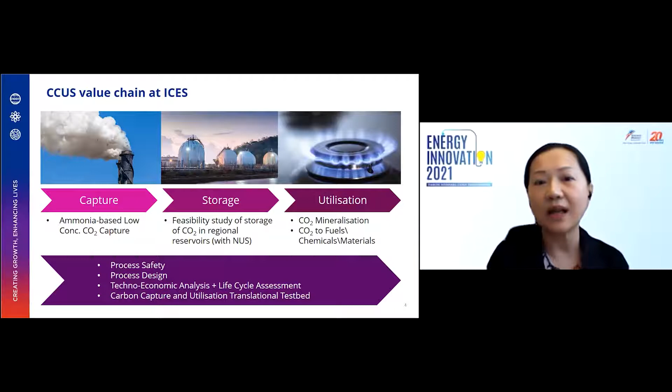And in the past few years, ICES has been working on the development of CCUS technology across the value chain. We work on capture, storage, and utilization. And in the meantime, we also have other capabilities such as process design and safety, techno-economic analysis, and life cycle assessment to support the research. And last but not least, importantly, recently we initiated the conceptual design of a carbon capture and utilization translational testbed.

So let's go to our first topic on CO2 mineralization. And we know human beings are facing the threat of sea level rising. And Singapore is very vulnerable to this because 30% of our land in Singapore is lower than 5 meters above the sea level, including many important areas such as Jurong Island. So we need a large amount of sand for coastal protection.

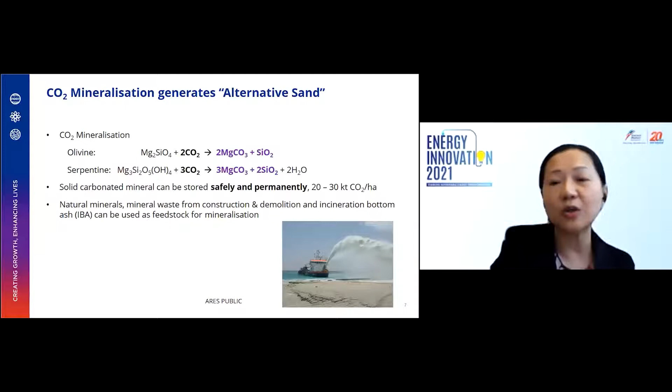And actually, CO2 mineralization is able to utilize waste carbon dioxide to do the mineralization. And this will generate a solid carbonated material and is useful for land reclamation. And the raw material that can be used is not limited to the natural minerals. Other waste materials such as incineration bottom ash, waste from construction, all can be used for this mineralization. And ICES has developed a novel CO2 mineralization technology. So in the next slide, let me take you through a little bit of the technical details. Let me show my laser pointer.

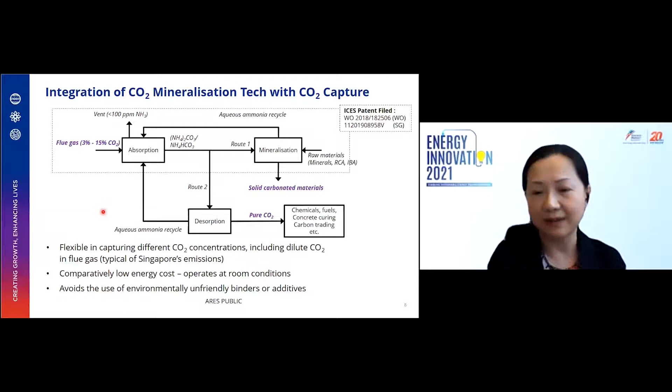So our technology actually can bring 3 benefits to Singapore. It can reduce carbon dioxide emission, permanently fixing carbon dioxide in solid materials. And for these materials, if we use some of the waste material, it will reduce the landfills. And in the meantime, this can be used as alternative sands or as building materials, which means we can reduce sand imports.

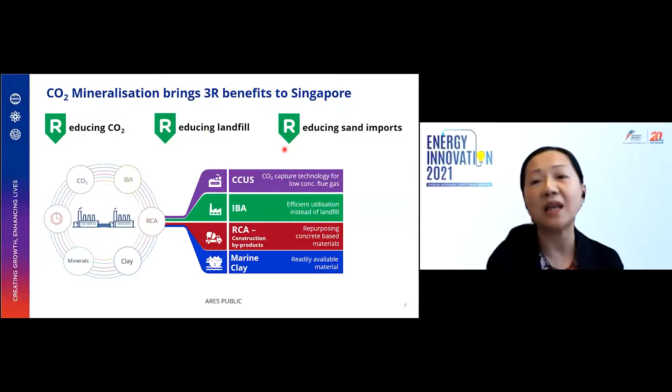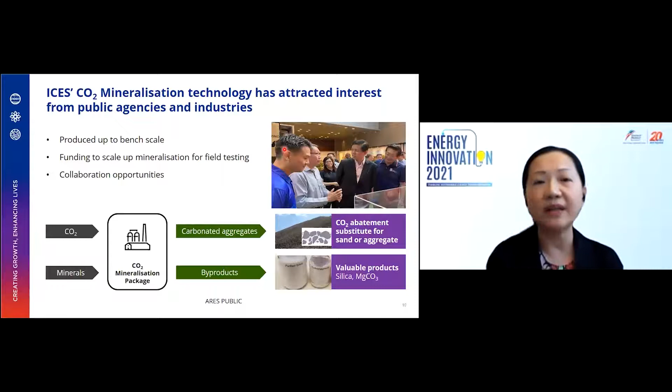And our technology has attracted interest from many public agencies and industries. So we are aiming at scaling up the technology for field testing in future. And we're also looking for collaboration opportunities to bring this technology to commercial scale.

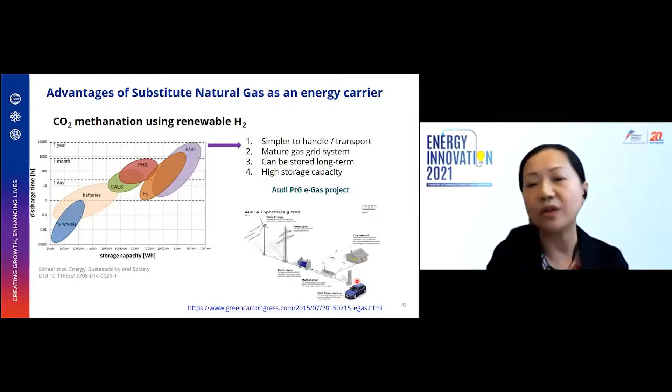And here shows the example of the Audi power-to-gas e-gas project. So they can use this SNG as an energy carrier to convert renewable energy into methane, and this can be used to drive cars. IHI is a Japanese heavy industry company, and we have been working with them for years to develop catalysts and technology for this CO2 methanation.

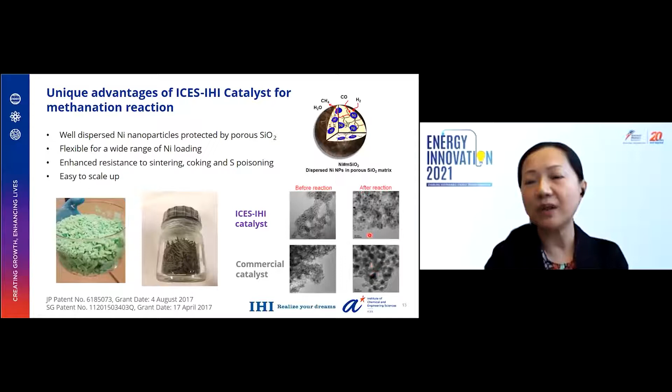And we have developed a very unique structured catalyst, which is flexible and can be synthesized for a wide range of nickel loading as the active phase for the reaction. And this catalyst is very robust. It has good coking resistance, sulfur resistance, and sintering resistance as well. So you can see here we have much smaller particles after reaction compared to a commercial benchmark catalyst.

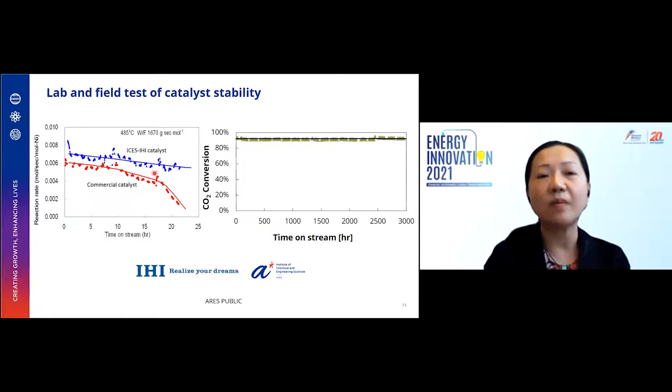And this catalyst has been tested in Japan as well, in the field test as well as in the lab test, for CO2 as well as CO methanation reaction. And the catalyst has shown very good thermal stability and also activity compared to a benchmark commercial catalyst.

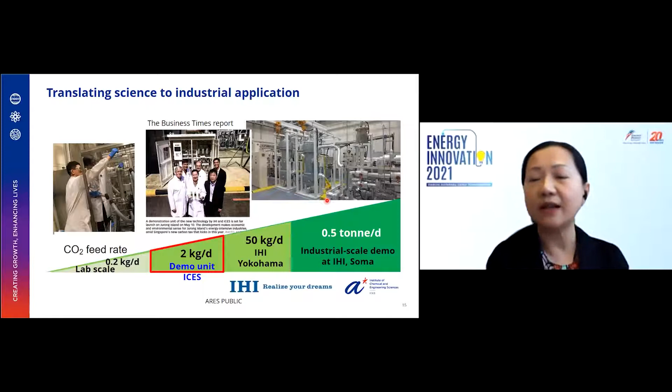So together with IHI, we have successfully translated this catalyst and technology from very small lab scale up to now a 0.5 tons per day CO2 commercial industrial scale demonstration at Japan's Soma Green Energy Center.

And the next topic is CO2 to jet fuels. You can see here in Singapore, in 2017 alone, we consumed about 8 million tons of jet fuel, and this will release millions of tons of carbon dioxide. Although there are solutions using battery or hydrogen to decarbonize the aviation industry, there's a limitation, because hydrogen and batteries have very, very low energy density compared to hydrocarbon fuels. And they're not drop-in fuels, which means you need a lot of change to the infrastructure overall.

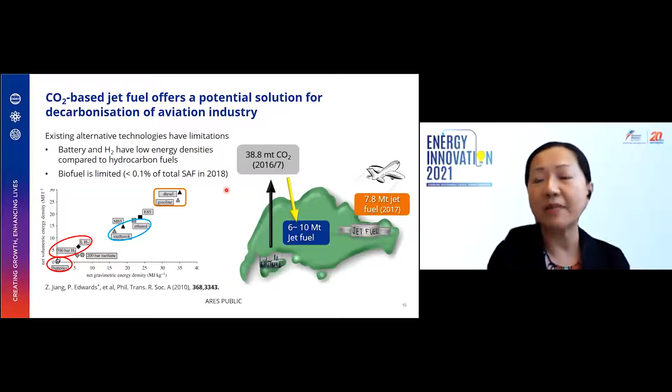Biofuel is another choice, but the availability of biofuel is also very limited. So CO2 can actually be used as raw material to make jet fuel. And this is a significant advantage because we can help reduce CO2 emission and also help the decarbonization of the aviation industry. And in ICES, we are working on this direct thermocatalytic conversion of CO2 to jet fuels.

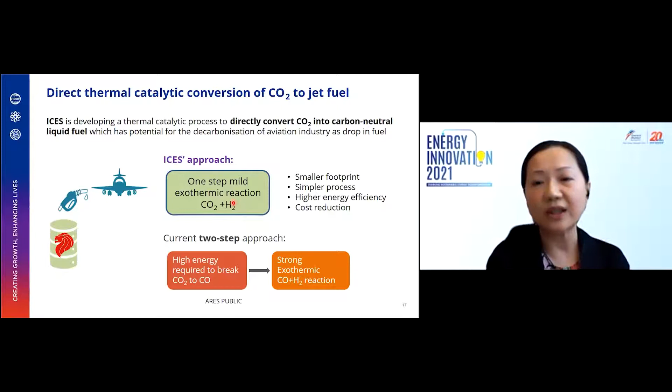Compared to the current two-step approach, we are using a one-step direct approach. And this approach has advantages such as smaller footprint, simpler process, and higher energy efficiency, and all this will bring cost reduction. And with the support of A-star seed funding, we have some very promising preliminary results.

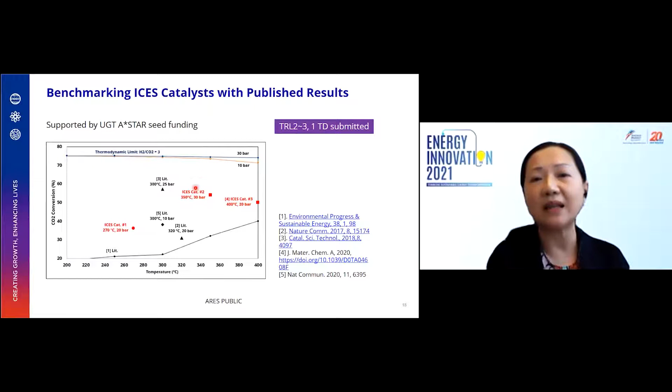So the red color is our catalyst, and we benchmarked it with some good literature results, and the results are quite comparable. And of course, compared to the thermodynamic limitation prediction, we still have room to improve the catalytic performance. And the next one is CO2 to methanol.

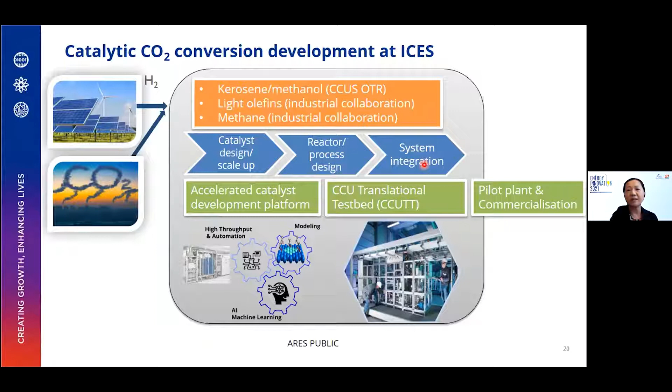So this page summarizes our catalytic conversion of CO2 to fuels and chemicals. We can work on catalyst design, scaling up, reactor process design, and also system integrations. So with the support of our accelerated catalyst development platform with our sister RIs, IMRE and IHPC, and this translational testbed, we hope we can accelerate the transformation of the technology from lab to commercial pilot plant testing scales.

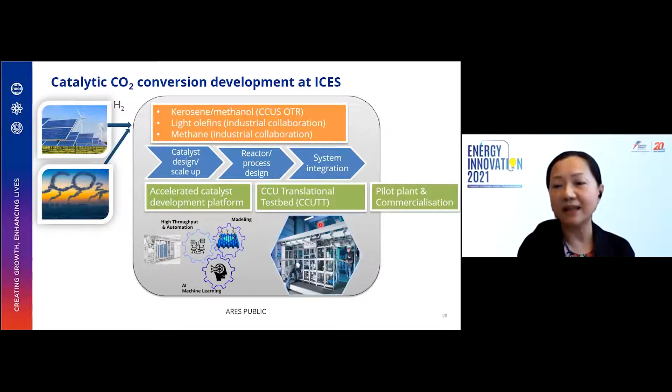And so the next topic is this translational testbed. So why do we need this testbed? It's well recognized that there's a valley of death in the translation of research ideas into industrial scales, particularly in the process industry, where the scale and the cost of failure increase with the TRL level. That's why companies are very selective when they choose the technology to testbed. While research performers always have limited resources to validate their breakthrough ideas at larger scales. So many breakthrough ideas fall into this valley of death, and this is where the major de-risking is necessary.

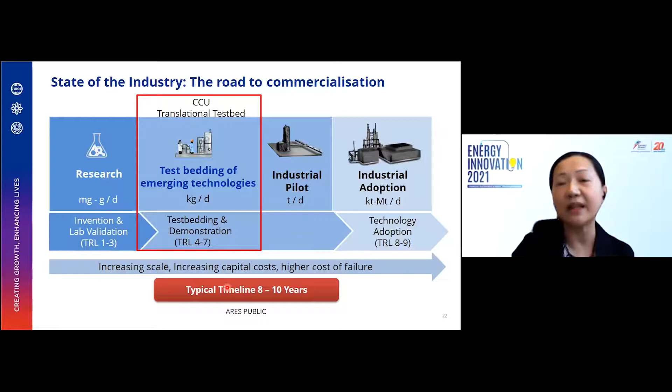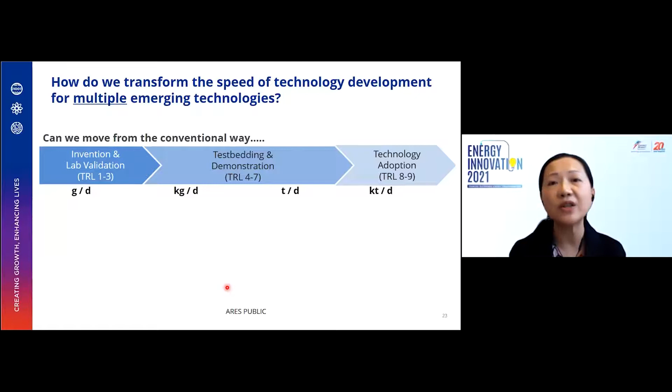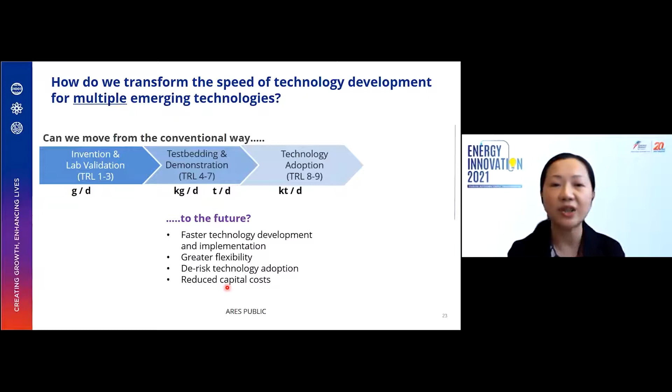And in addition, a single technology usually will take about 10 years to be commercially available in the chemical industry. So the question for ICES is whether we can move away from this conventional approach to be faster, more cost-effective and more flexible in developing not just a single technology, but multiple different emerging technologies, and help companies to de-risk business decisions.

So our response to this is a unique, first in its kind, flexible, modular, plug and play testbed, which will allow us to rapidly adapt the testbed to perform and demonstrate different types of emerging CCU technology, from research performers, startups, or technology providers, under more realistic industrial conditions. Examples of CCUS technology can be membranes for CO2 capture, liquid and solid-based capture technology, or CO2 conversions. So we hope through this concept we can accelerate the translation of CCU technologies and de-risk business decisions for the next step of industrial piloting or ultimately adoption.

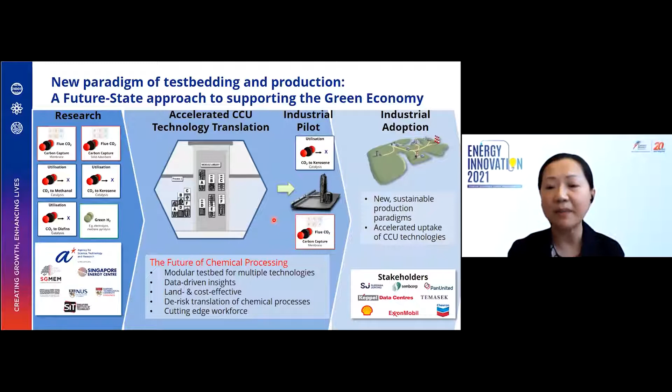So this comes to the end of my presentation with 3 key takeaways. ICES is active in research areas of CCUS with different TRLs. And the unique, first in its class, flexible, modular, plug-and-play testbed is at the conceptual design phase. We hope this will greatly help the acceleration of the translation of technology. And we are looking for researchers and industrial partners for collaborations.

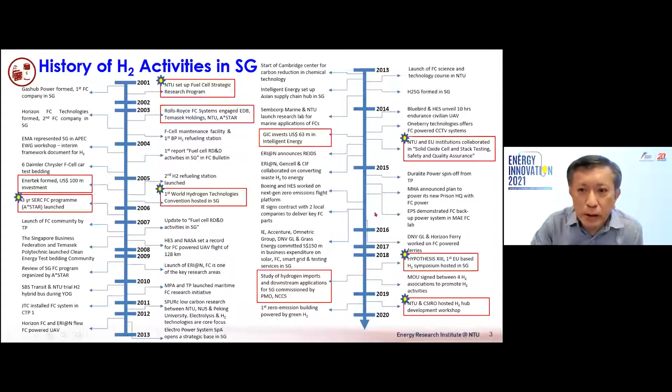Next is the hydrogen and fuel cell research journey that I walked through. I started off with methanol reforming, and then, with funding support from British Gas, I worked on natural gas reforming. Then I moved to solid oxide fuel cells, then PEM fuel cells, then electrolyzer cells, solid oxide electrolyzer cells, then PEM electrolyzer cells. More recently, my research effort is more focused on the commercialization of PEM technology, and some cracking technology, including ammonia cracking and CDM, which stands for catalytic decomposition of methane, or methane cracking. Last but not least, some feasibility studies.

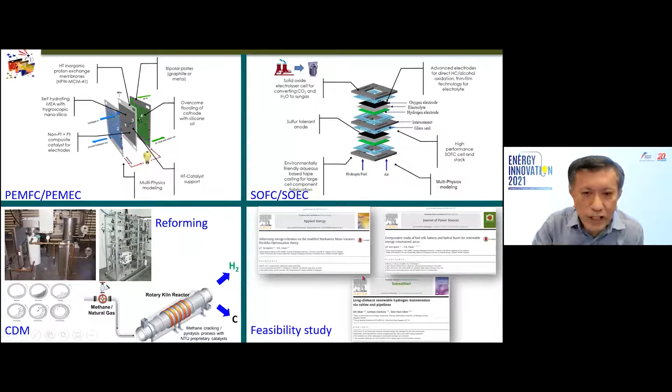And the latest paper that we have published is on long-distance renewable hydrogen transmission via cable and pipeline. So this is actually a case for Singapore: if we transport hydrogen from Australia to Singapore, covering a distance of 4,500 kilometers, we look at the cost and a lot of the constraints as well.

So a snapshot of the hydrogen and fuel cell research over the last 30 years: you can see there are many projects, including an industrial project where we pushed a fuel cell system to Jurong Island and tapped the gas from a chlor-alkali plant, Far East chemical industry, and proved that hydrogen from industry can be used to generate power. And you can see these are fuel cell systems developed in-house, a 5 kilowatt combined heat and power system. We also fly UAVs using fuel cells, and some hydrogen generation projects as well.

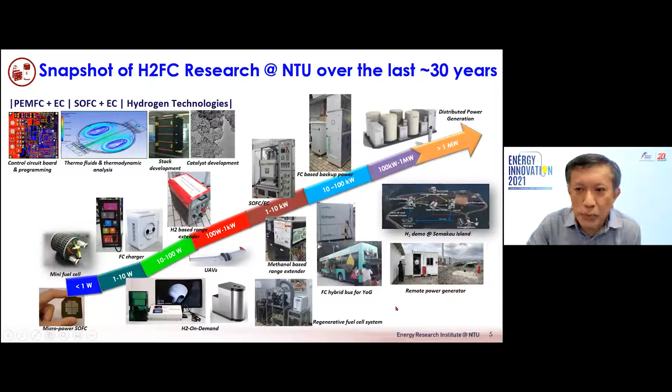There are 4 laboratories. One is for fuel cell fabrication and demonstration, including the methane cracking project. One is on power to gas. Just now, Leeway also shared converting CO2 and hydrogen into methane. And we have one laboratory devoted to catalyst fabrication, and this technology has been transferred to industry. And the last laboratory I have is in the China-Singapore International Joint Research Institute at Guangzhou Knowledge City, meant for commercialization and supporting industry on fuel cell projects.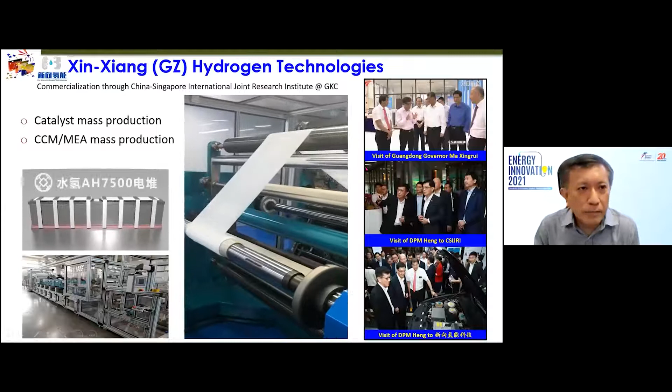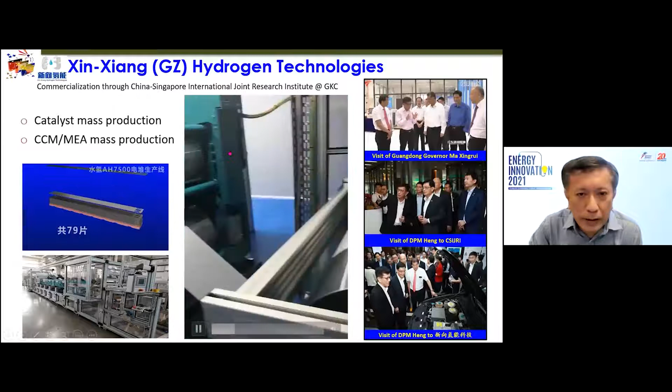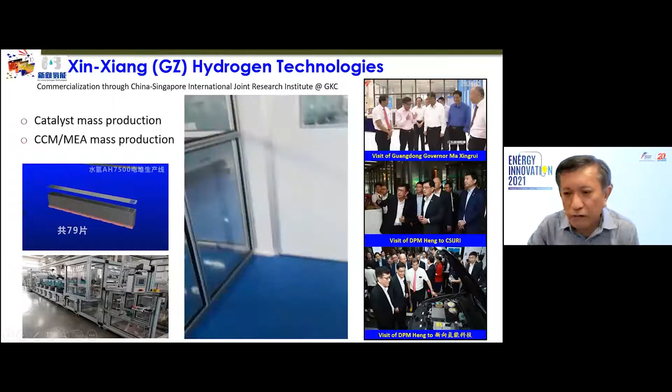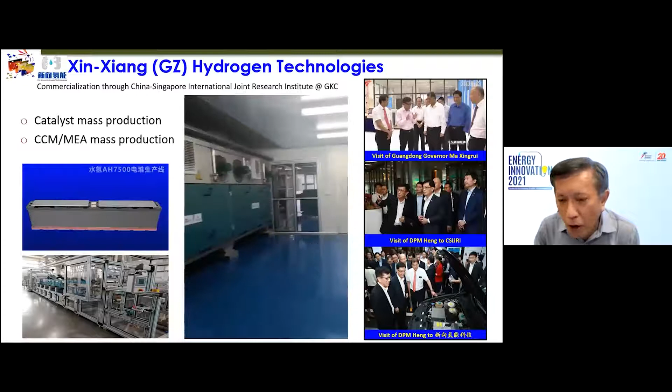And here you can see the company that I set up, commercialized through the China-Singapore International Joint Research Institute. The company focuses on catalyst mass production and CCM or MEA mass production as well. This was made into a fuel cell stack by our sister company and demonstrated in a fuel cell vehicle. Essentially, this is a range extender, not a full fuel cell vehicle. There are 2 7.5 kilowatt units, making 15 kilowatts, that use methanol as fuel, with onboard reforming generating hydrogen for the vehicle. DPM Heng and the Governor actually visited the company.

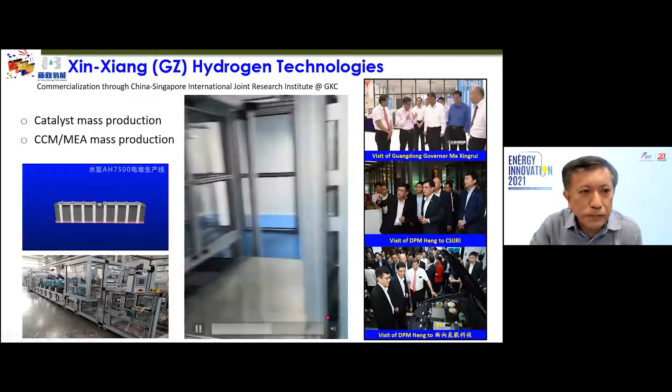Another effort is that NTU and Sydrogen Energy formed a partnership. If you read the newspaper in the last few days, Sydrogen was formed in March, a JV company of Nanofilm and Temasek, and they set aside 140 million for this effort. The core activity is manufacturing fuel cells. The collaboration with NTU is on PEM technology, and we license the technology to them to fabricate the CCM and the catalyst, key component design and manufacturing, and full characterization of the fuel cell.

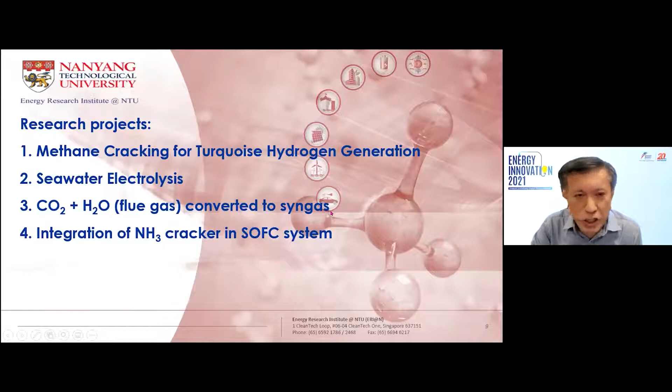Now come to the 4 projects that I'd like to share with you. The first one is methane cracking for turquoise hydrogen generation. Essentially, this is a technology that can potentially produce hydrogen at a cost like SMR, but without the CO2.

So methane is cracked into hydrogen and carbon. The byproduct carbon is actually graphite powder and can be valorized to offset the cost of the hydrogen. Traditionally, such a method is used to produce carbon black. Carbon black has a lower value than graphite, but even so people can afford to throw away the hydrogen because the carbon black is more valuable than the hydrogen. Carbon black is used mostly in car tires.

So in this project, we produce graphite powder instead of carbon black. Graphite powder has a lot of applications. One application you can think of is battery materials. If you look at the Tesla battery, one battery will need 96 kilograms of graphite powder. So you can expect growth in the demand for graphite when all the cars on the roads are converted to electric vehicles powered by batteries.

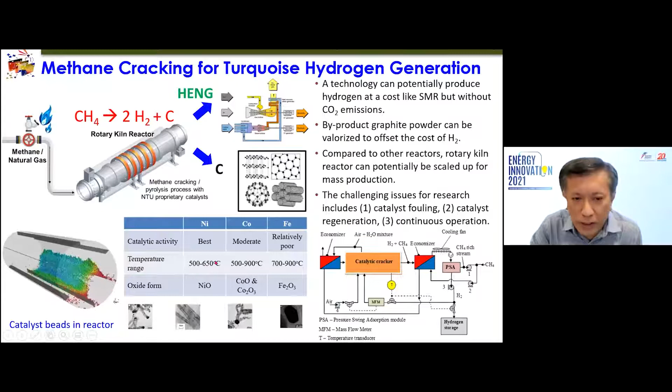There are different types of catalysts. Commercially, like the one used by Hazer Group, is iron. Iron has relatively poor catalytic activity. The best one so far is still nickel. The operating temperature is actually not as high as steam methane reforming. You can see the temperature range here can be quite low, 500 to 650 using nickel.

Another one is seawater electrolysis. The solid oxide cell is perhaps the only technology that can operate in both fuel cell and electrolyzer mode, meaning one device serves two purposes. This leads to less investment if such technology is used as an energy storage device. The electricity-to-hydrogen heating value efficiency can be more than 100% if waste heat is available. The electricity input is preferably from renewable energy. If we have waste heat, the waste heat and electricity combined, based on conservation of energy, give the hydrogen a higher enthalpy than the electricity we put in.

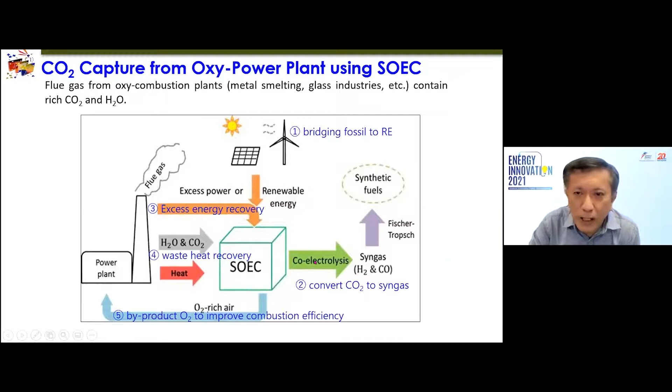But from here, you can see that it actually provides most of the oxygen needed in a combustion power plant. So for the downstream application, you can actually use it to produce synthetic fuel, like for example, kerosene. So the entire system is expected to have a very high efficiency.

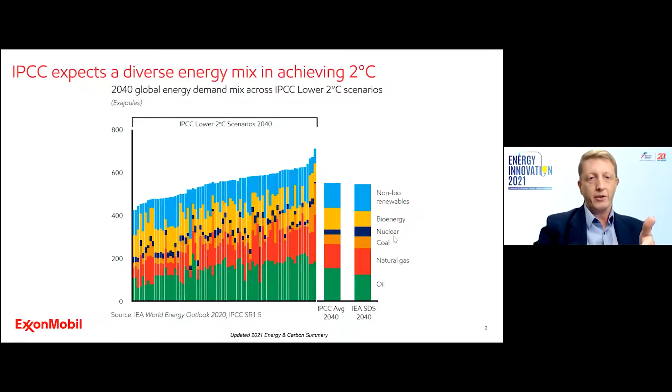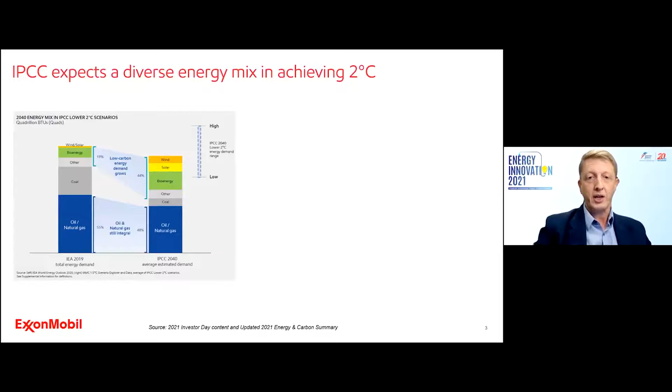So to put this in perspective, let's compare the 2019 energy demand mix versus the IPCC 2040 average mix. The color scheme, unfortunately, is different in this plot. I'm sorry for that, but the left figure here is the 2019 energy demand mix, and the right one is the average from the 2040. And what you're going to see is a few things that are kind of interesting. One is that energy consumption in 2040 is less than 2019.

In other words, to keep to the 2 degrees C scenario, we need to actually be consuming as a world less energy than we are today, with a much bigger population and a much larger GDP. So this really strongly implies a need for significant energy efficiency improvement. In other words, we need to use energy to do more with consuming less of it. There's obviously a very significant growth in low carbon energy, renewables, and so on. Interestingly, it shows that oil and gas still constitute about 48% of the total energy demand.

So then how are we doing on our way to this 2040 view? Well, if you compare how we did from 2010 to 2019 and the rates of growth of everything, you can see that historical growth rates for wind, solar, bioenergy, nuclear are actually much lower than what's needed. That's including extremely rapid growth in places like China. The energy demand for oil and natural gas and coal is higher. The growth is higher than what these IPCC scenarios suggest would be needed. And the energy efficiency improvements have not been fast enough. So that's sort of the state.

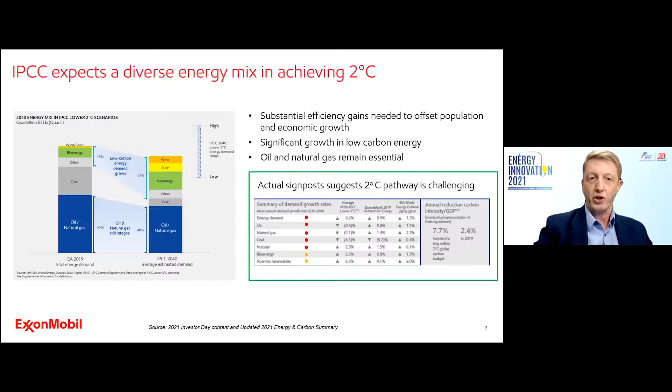And as the world recovers, it probably will look slightly different, but the basic thrust is that the emissions are quite large by the 4 sectors. So it's electricity generation from all sources, natural gas, coal, and so on. Industrial sector, which includes our industry, petrochemical, manufacturing, agriculture, and then transportation, all sources, trains, planes, automobiles, and ships, very importantly from Singapore's perspective, and then the residential commercial. And so this gives us a way to think through what is the R&D we want to focus on. And it's basically to focus on wedge scale or really gigaton scale CO2 mitigation.

So starting from the electricity generation, this is ExxonMobil's perspective. We're focused a lot on natural gas, which is 95% plus of Singapore's own electricity generation, with CCUS and the renewables and energy storage, grid energy storage.

Then on the industrial side, it's reducing the energy intensity and the emissions intensity associated with manufacturing. Once again, this is ExxonMobil's perspective. What do we do in the refinery and the chemical plants on Jurong Island and nearby? We convert chemicals and we move fluids and we cool and heat things. And so new kinds of catalysts and new kinds of processes are going to be a big important part of energy efficiency improvements. And then of course, CCUS and hydrogen, where you'd have some sort of fuel replacement for

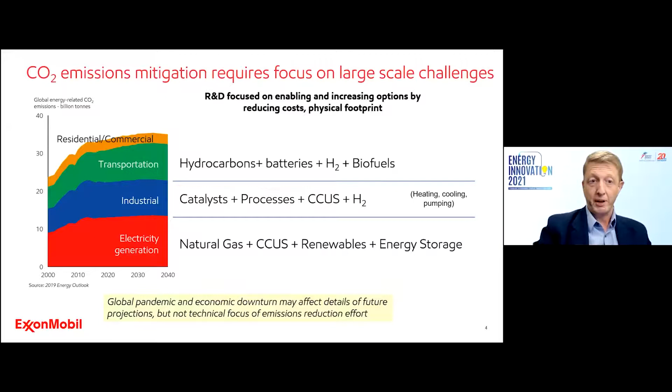some of those activities. And then on the transport side, hydrocarbon is still going to be a major part through 2040. But of course, batteries for transport, hydrogen and biofuels. And then on the residential commercial, it's new kinds of materials to reduce the emissions intensity, the energy intensity of construction and operations.

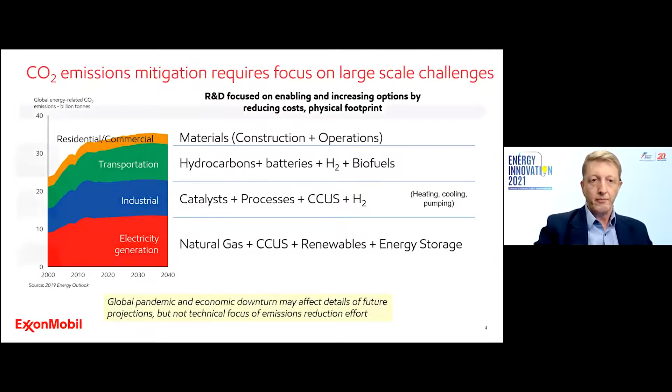So just focusing a bit more on CCUS, because that's a big topic today, and it is a big topic of what we're doing in Singapore. For some background context, ExxonMobil has a working interest in more than 1/5 of the world's capacity, capturing about 9 million tons of CO2 a year. That's a lot, but it's not nearly enough. I will definitely concede that. And actually, over the past 30 years, ExxonMobil has captured more CO2 than any other company, accounting for about 40%

of cumulative CO2 captured. Earlier this year, ExxonMobil announced a new low carbon solutions business. Initially, they plan to advance a number of carbon capture and storage opportunities around the world, including, they explicitly mentioned, Singapore, Southeast Asia as well. They plan to invest about $3 billion through 2025 on commercial CCS projects, not R&D. So the R&D I'm talking about now is not part of that, but it's rather feeding and supporting the LCS, the low carbon solutions team, which is important because we're focused on the next generation of CCUS technologies.

And in fact, we're focused on technologies with lower CapEx, lower physical footprint, which is really significant for Singapore, that require lower energy for operations. And I show you the buckets of how we're thinking about it. The cost and the technologies very much depend on the concentrations of the CO2, as you might imagine. I kind of had 3 large buckets. Of course, as you get into the details, you can subdivide it a lot more.

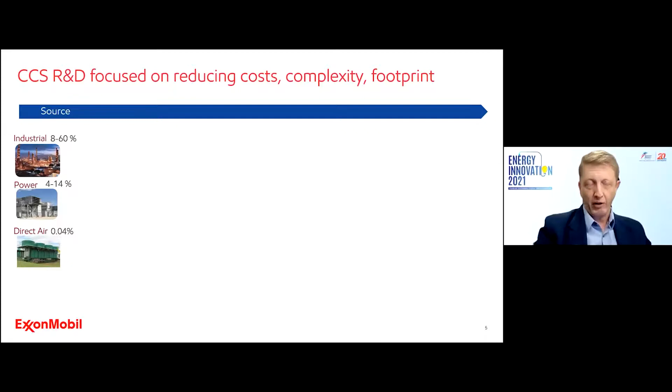So in our R&D, just as an R&D way of thinking through things, we're focused on new kinds of materials. So for liquid and solid based carbon capture technologies, as well as carbonate fuel cells, which is something we've talked about publicly in the past. Here, the research is focused on materials with high working capacity, fast transport kinetics, and low regeneration energy.

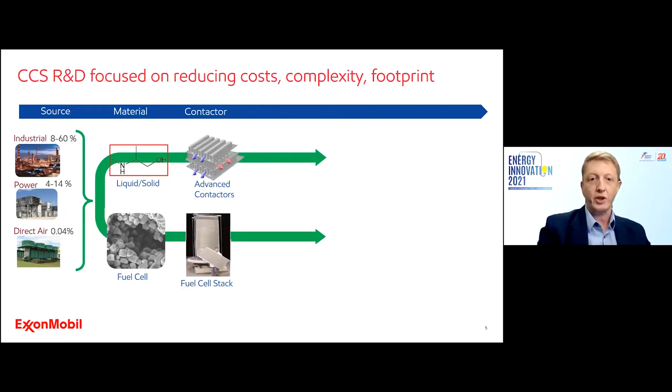Then you take those materials and you need to put them into some sort of contactor that can interact with the flue stream, so you can actually access and touch a lot of the CO2. So the research is on modular and easily scalable with a small physical footprint and therefore a high volumetric capacity. And then once you have those, you need to come up with an optimal process, or a process that's amenable to retrofit and transient operations.

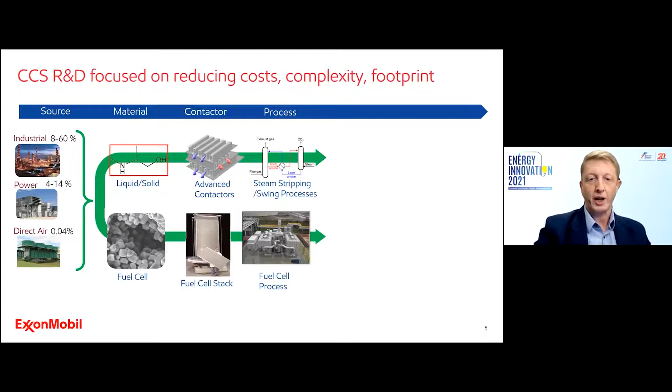I mean, we're not even talking about that here, but natural gas peaker plants will probably become increasingly important as renewables grow on various grids. And so transient operation CCS is going to become increasingly important. And it must have low utility requirements, low toxicity, and all those kinds of things. And then finally, of course, there's the disposition. What do you do with the CO2 after you've captured it?

ExxonMobil's primary thrust is mostly on the sequestration underground, either in depleted oil and gas fields or saline formations. And that's primarily because that's what you can do at scale today and probably for the near future. But of course, utilization, as very nicely described by Prof. Chen, is an interesting topic from a research point of view. That's a little bit earlier on the technical readiness level, but you can certainly convert the CO2 into other products as well.

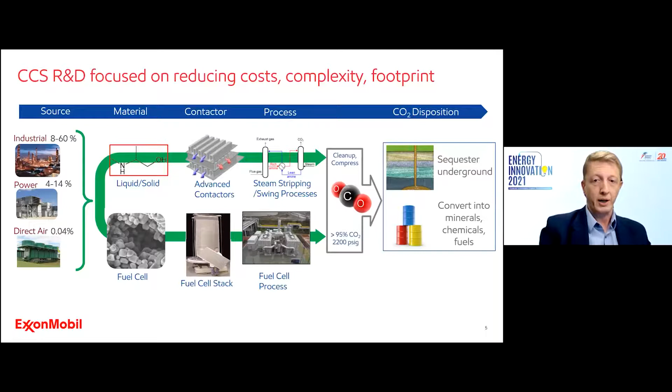So I'd like to end with talking a bit about some projects that are being progressed at the Singapore Energy Center. And these projects on the left are known in the Singapore Energy Center lingo as core projects, meaning that these are not collaborative with ExxonMobil. These are funded by the Energy Center like a consortia. They were selected by a committee. These are 5 of the 6 projects. And I'll just quickly mention them.

They're on new materials, metal organic frameworks, for, as I mentioned, where the applications would be. Methane cracking, I will not dare to touch that because that is Prof. Chen's project, and it's a piece, of course, of what he's been doing over the years. CO2 capture and utilization using the fly bottom ash and brine from Singapore's material waste facilities, as well as the desalination plants. Very interesting, combining 3 grand challenges at once. It's a tough nut to crack, but it's very interesting.

Membranes for CO2 separations. Membranes really require a high partial pressure of CO2 to be a driving force to do the separation. So membranes for CO2 separations are probably more useful not for power generation, where it's at atmospheric pressure, but for other things, potentially steam methane reforming or other processes that have high pressures.

And then finally, photoelectrolysis for renewable hydrogen production. The challenges there were actually identified very nicely by Prof. Chen. All green hydrogen today, for that matter, is really generated from water, not salt water. And so there are a host of issues. In addition to those mentioned by Prof. Chen, seawater is filled with microbes. So there's microbial corrosion, all those kinds of things. So it's really an interesting project.

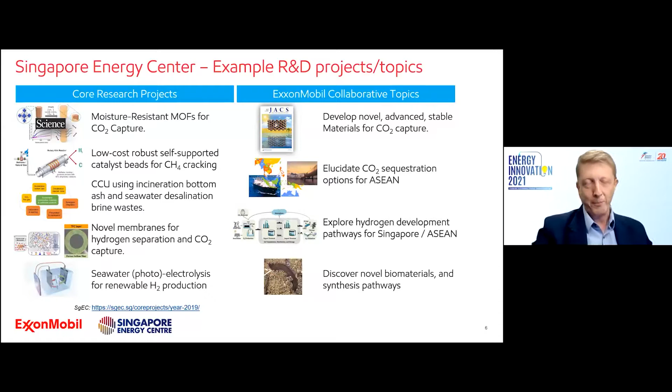And then finally is one different example, leveraging the incredible biodiversity in Southeast Asia. You've probably heard that research scientists are constantly using bioprospecting, looking to nature to inspire new designs and new kinds of enzymes, inspire catalysts, and so on. And here you can find locally, in fact, I went with the postdocs to Pulau Ubin, a velvet worm. It's really hard to find, actually. You have to run around through the leaves and so on. But they shoot out a polymer like Spider-Man, and they catch their prey, and the polymer hardens really quickly. So our chemical company looks at that and goes, oh my God, you could build a building with a fire hose. I mean, that's a dream.

But the research is on understanding what's causing the mechanical performance of that polymer. What are the proteins? Where are the proteins? What are the genomics that are leading to the synthesis of those proteins in this velvet worm and so on? So we're very excited about this portfolio of research, really touching on decarbonization from many different threads.

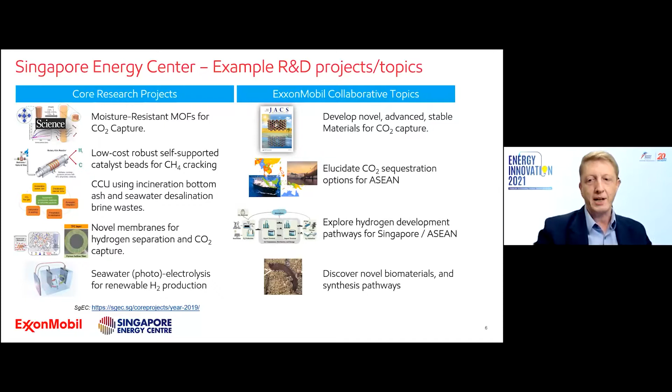Thank you, Adam. Thank you so much for sharing with us your industry perspective as well as the work that's going on at the Singapore Energy Centre. And I'd just like to thank our three speakers once again for your presentations and for sharing with us on the current landscape of work being done on decarbonisation.

I'm just going to keep an eye on the time. We have a few minutes left, but maybe we'll ask the panelists to help us with one of the questions that came up. So one of these questions from the audience is, by 2030, which new technology, for example, carbon capture, CO2 to chemicals, hydrogen economy, waste to chemicals, plastics to chemicals, would you consider as a game changer, such that it plays more of a dominant role than simply just increasing energy efficiency? So that's for any of the panelists or all three panelists, if they would like to chime in on this.

I can take a first shot. I would say everything listed by Tej, whose office is right next to mine at NTU, is important. And we don't know what the winners are going to be, to be honest. From the way the question is formulated, it wasn't clear which of these are going to be dominant, because I would put energy efficiency in kind of a different category. A lot of these are like carbon recycling and so on, or other things like carbon capture and sequestration. I would not necessarily pitch that as energy efficiency. That's a CO2 mitigation technology.